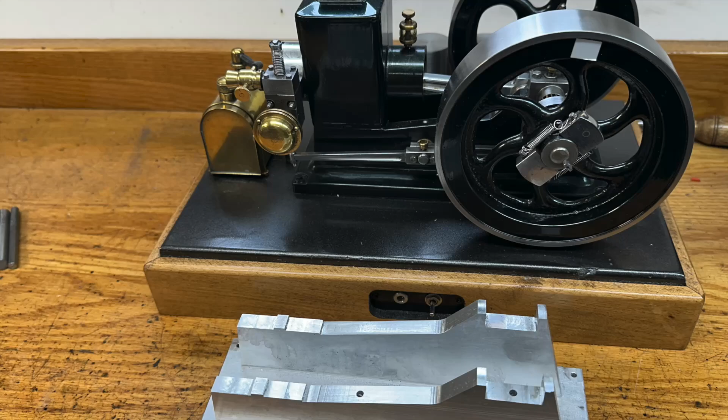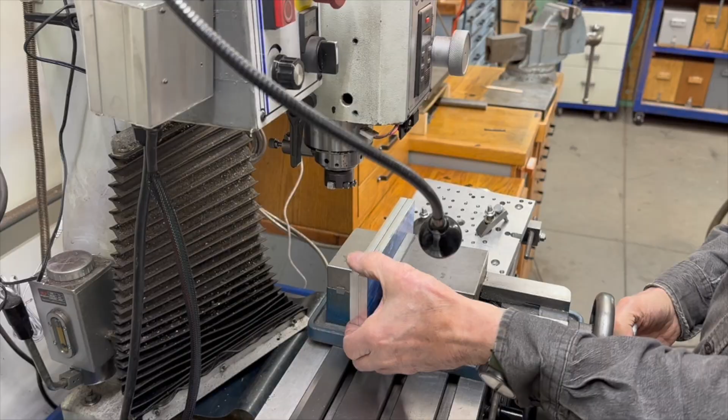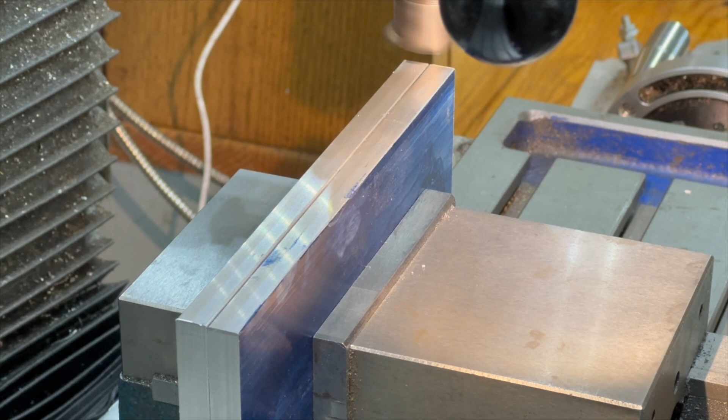So I've already put the bluing on it, and I've got them squared and finished on the edges and exactly the length. So I can go ahead and start laying it out. So this is extruded stock, and because of that it has a tiny rounded edge on it, and I want that absolutely flat and square, and it wouldn't necessarily be exactly square, so I'm going to take just a slight cut off the bottom of this. I'm going to take about 10 thousandths off of this for the first run here. That should be plenty.

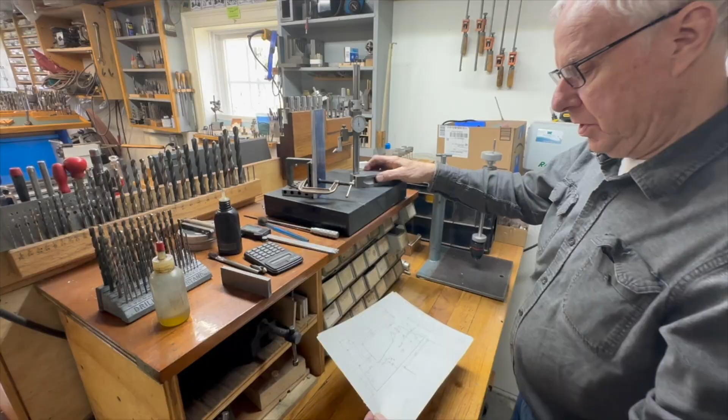So this is the bottom, and that's the back here. And so all my dimensions are from here. So I can just start drawing those lines. And the first one is at 7 1/4. And this not being a 7-inch height gauge, I have to put it on top of 2 blocks to get up to 7 1/4 inches. And that's going to be 5 1/4. That's just right. Okay. The next one down is the point, which is 7 1/8. So that's the angle there, an 1/8 inch.

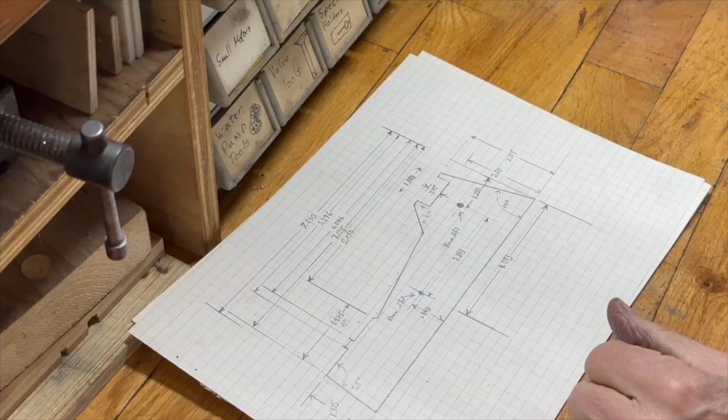And then we've got 5 296. We've got 5 296. Next one is down 1/4, so that's 1 250, right there. That's the notch. And then this is 5 1/4. Come down here to 2 150.

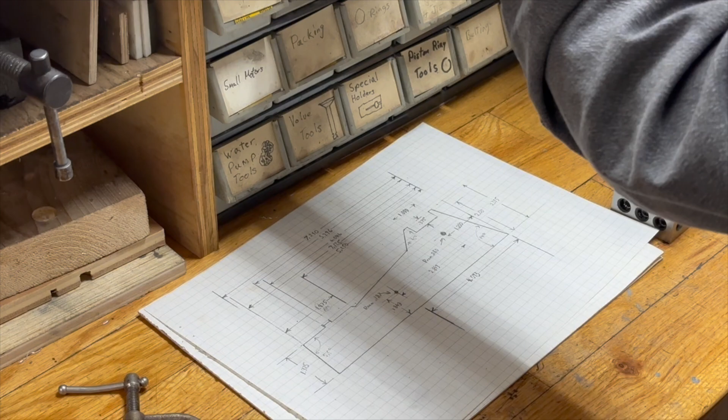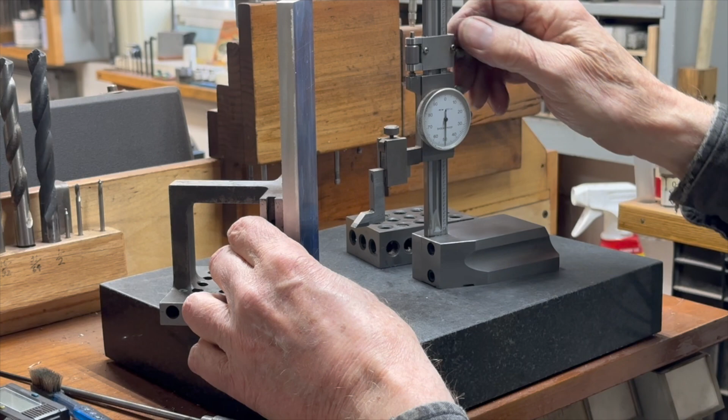The center of the bearing is at 1 inch and 1/4, 250. And then the bearing itself is an inch wide, so I just go 500 thousandths each side of that. So I'm going to go to 175, 1,750 I should say. That should be 1 inch right there. And that should do it.

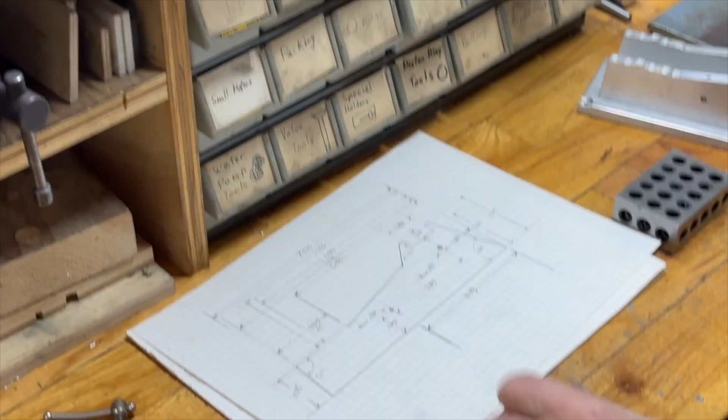No, we got one more dimension here. One that I didn't add up. Oh yes, I did. 493. Okay. 4093. Right there. So this is the hole. And the hole is 843 from the bottom. And then I'm not going to mark the hole for the gears yet. I'm going to wait till I get the gears in and then measure them.

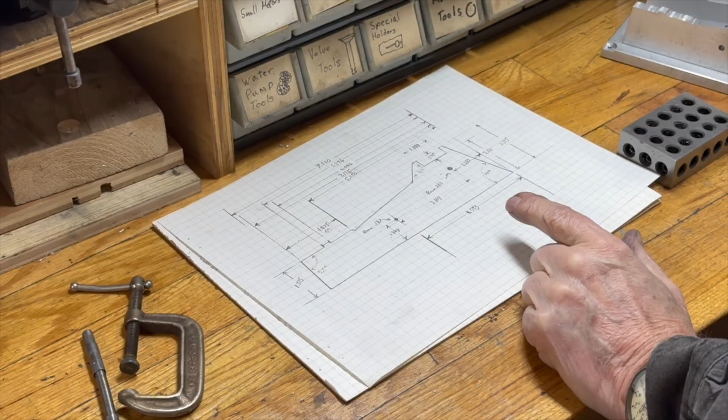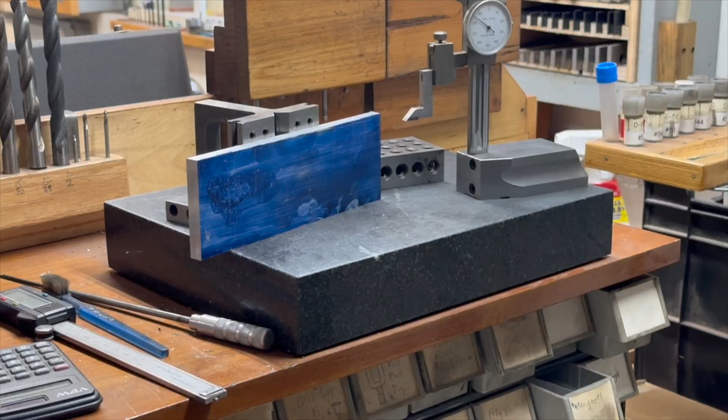Let's see, 2,375. Okay, that's it. The only thing I have to mark now is these two ones here for an 1/8 inch. Now this is the back angle here, comes off of this one. So I'm going to go 125, mark it. I'm going to come down here. This basically is eyeball stuff. Okay, so I'm going to go down 125. Put a mark there.

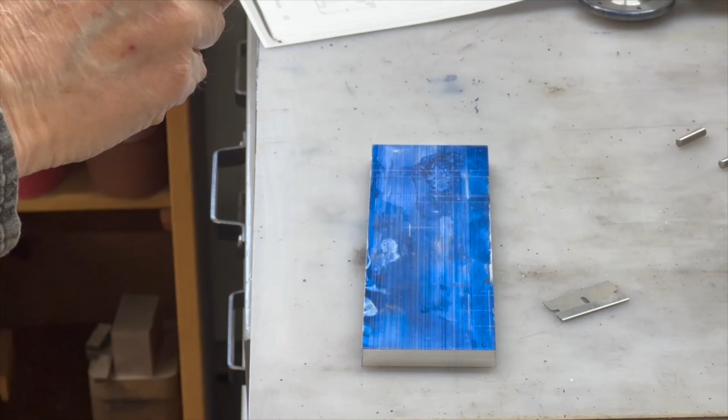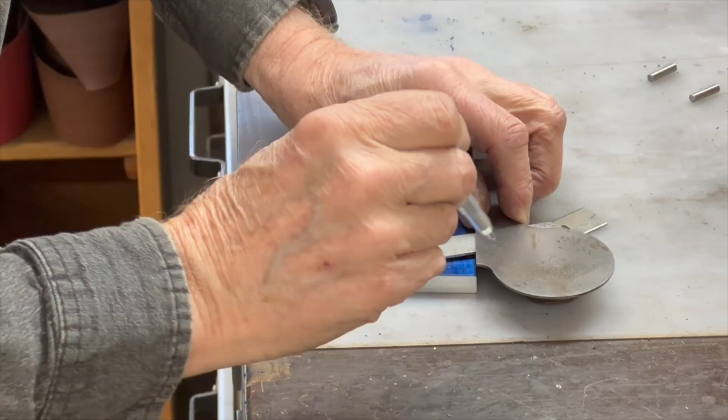Now I'm going to do some of the layout with a protractor. This back angle is going to be 14 degrees. So I'm going to just set this at 14 degrees and see how my marks came out. I have to use an eye loupe for this. Well, it's already on 14 degrees. So let's check that out. Put this right on. Put a mark on it. Pretty close, I would say. And the other one is a 45 degrees. It's off of here.

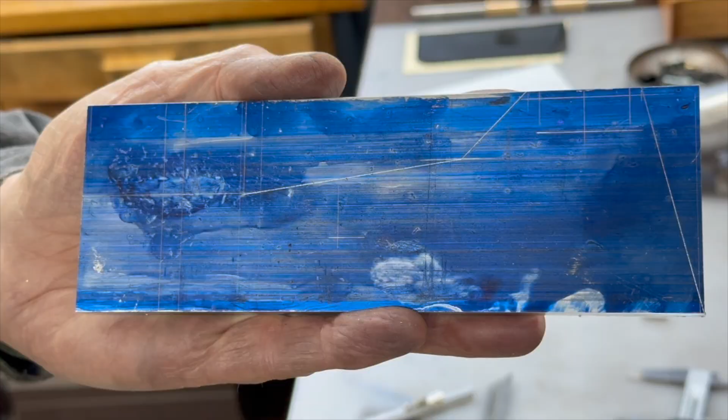And then we got to go down to here. So you're going to have to get a ruler and do that. 1 and 23/32. This one goes down to here. Okay, so there's the layout. I don't know if you can see it or not, but I'm going to go up and cut this out on the bandsaw. I forgot to mark the front here. It's 5.5 degrees. That done. Right there. I have to cut that off.

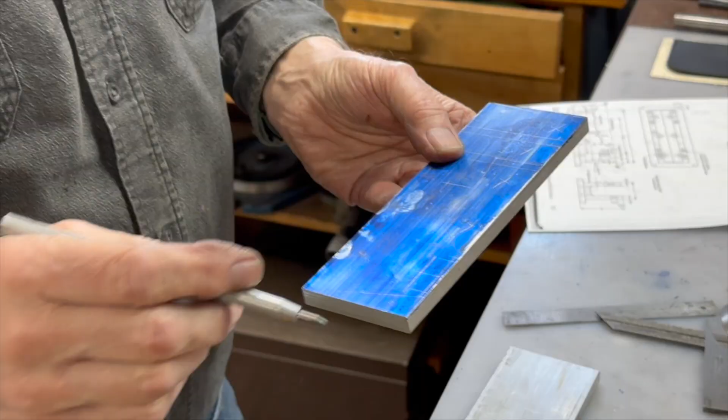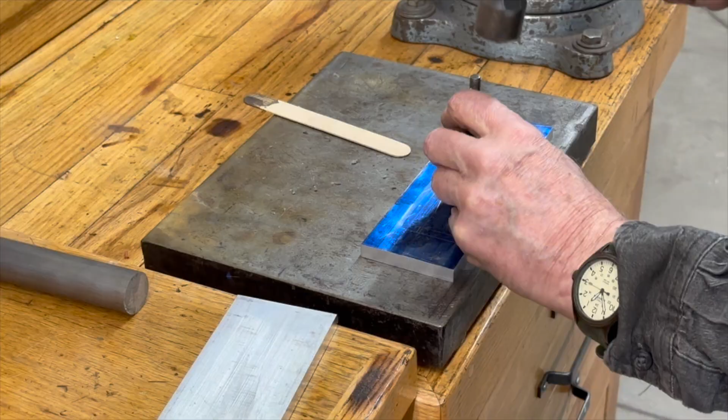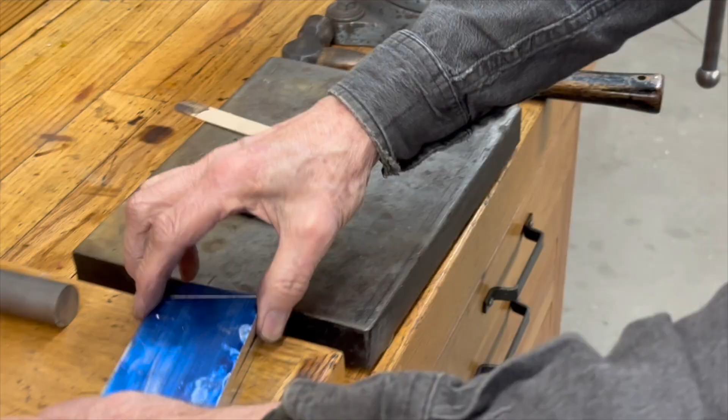And these degrees will be set better once I get in the mill, or I'll mill those edges. But I'm going to first saw it out on the bandsaw. So before I do these, I got to put them together and saw them out together. I'm going to put 2 prick punch marks here and drill 2 holes. This is for this hole we're going to use, but this one over here is just going to be waste after I cut it out, so that one won't matter. I'm going to put 2 3/16 holes right through the both of them when they're lined up perfect. So when I saw it out, I get both of them together.

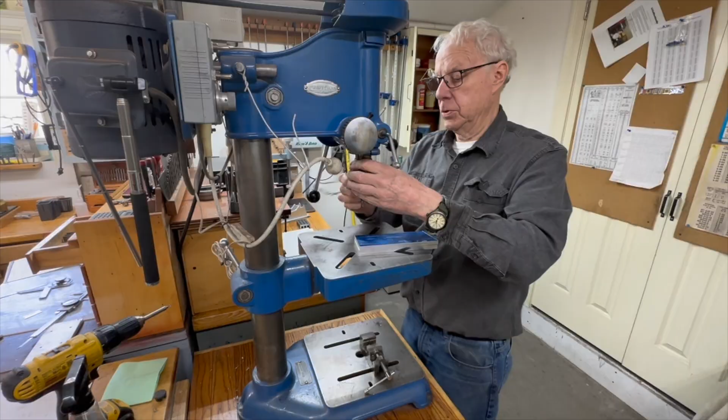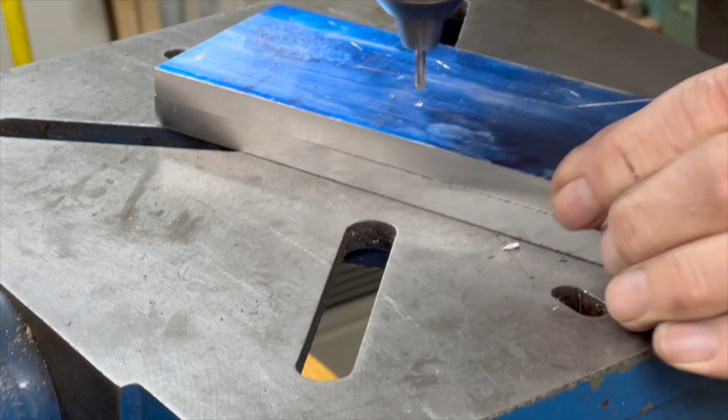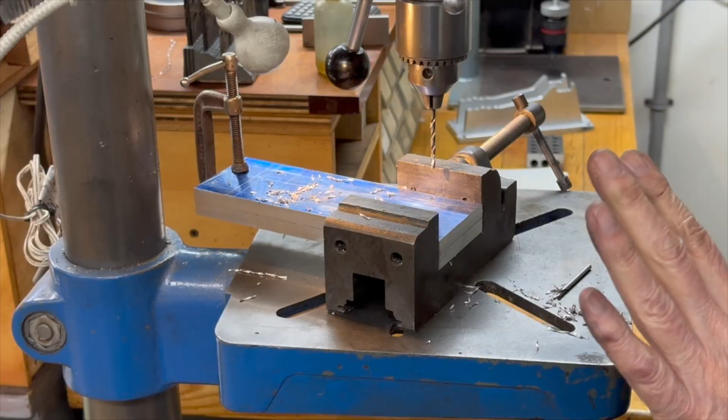Just going to spot drill those first, just in the top one. Get those even together. I'll put a clamp on them so that I can hold them in that place. Because I have to move this over. I think I ought to put it on this end, because I have to move it over to drill that one. Now I'm going to put a 3/16 inch pin in there, so I want a reamed hole. So I'm going to get a drill that's just under 3/16, 187. We go with 182, a number 14 drill.

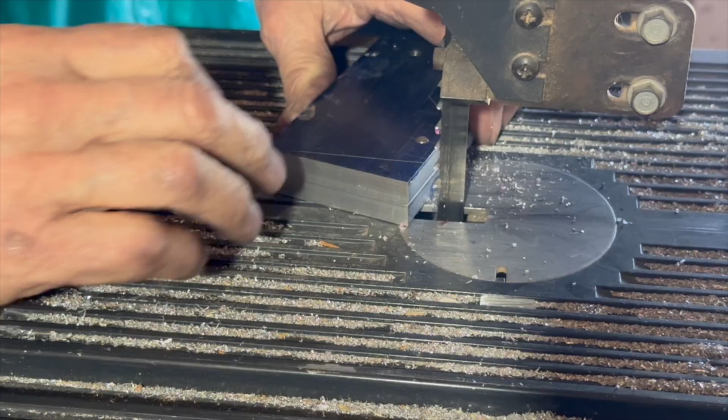Check that with the pin. Okay, this is an old bandsaw with a wood cutting blade in there, and that'll rip through aluminum pretty well, but you do have to put a little wax on it. It's pretty noisy.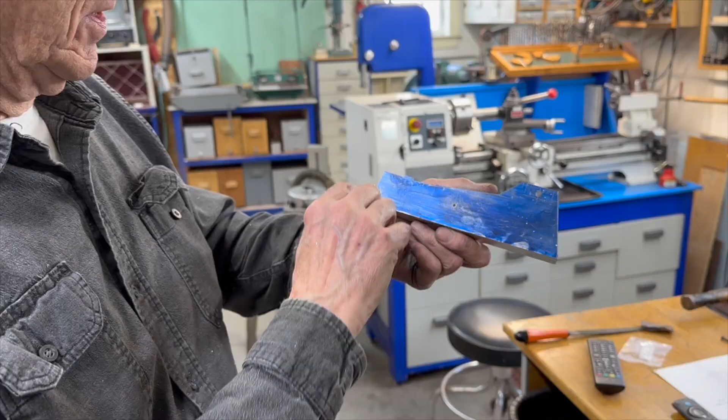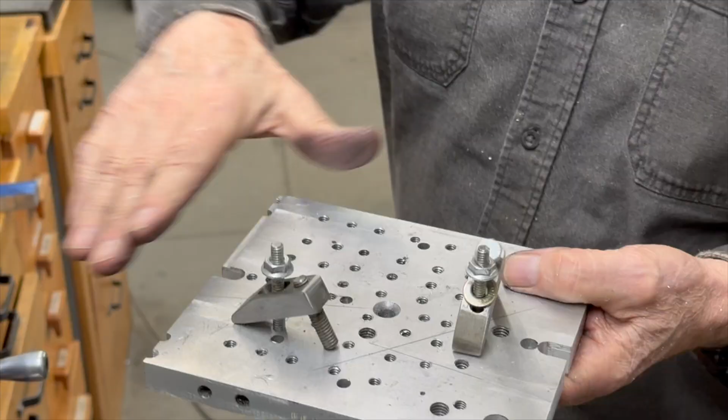Roughed out. So the next thing we're going to do is clean all this up with an end mill and get those angles perfect and get the ends right. And we're going to cut into this for the bearing block. So this is what I use on the milling machine when I have to do things on the flat and do things on the edge, and I can set this at an angle and do almost anything with it.

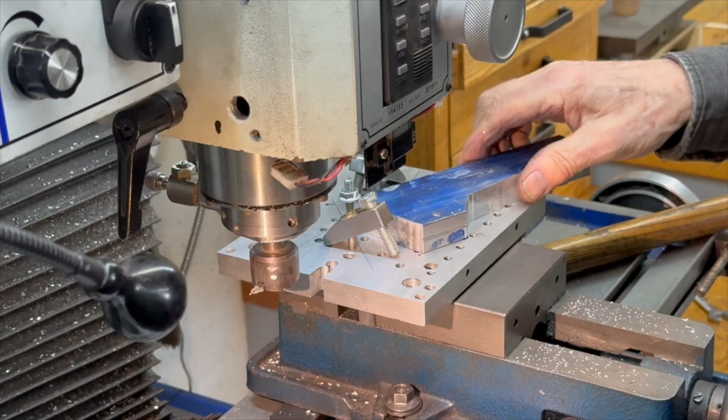I have to demonstrate it probably to show you, but I just put this up there like that, and I figure out what this angle is, and I go off of this angle and I can clamp it down and cut that back edge. So the first one I'm going to do is a 14-degree angle. I'm pretty sure that that is still a 14 here, so I'm going to try that.

So this block is squared all the way around here. I put it in, and it's marked front here. So if I put it in that way every time, the angle should come out just right. I'm going to move this up just a little bit, keep it near the front.

Somewhere near where it belongs, and put a couple of hold downs on it. So that being 14 degrees here, this should be exactly straight. I'm going to put one more clamp over here. I have to have this far enough out so that it doesn't hit the works in there when I make the cut.

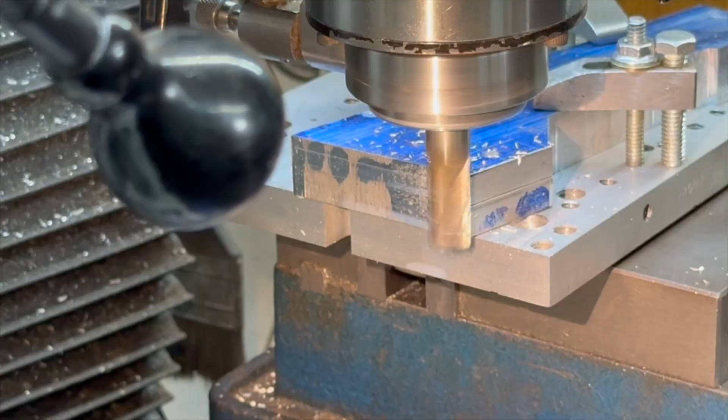Number one, gotta go in a little deeper. Everything's good.

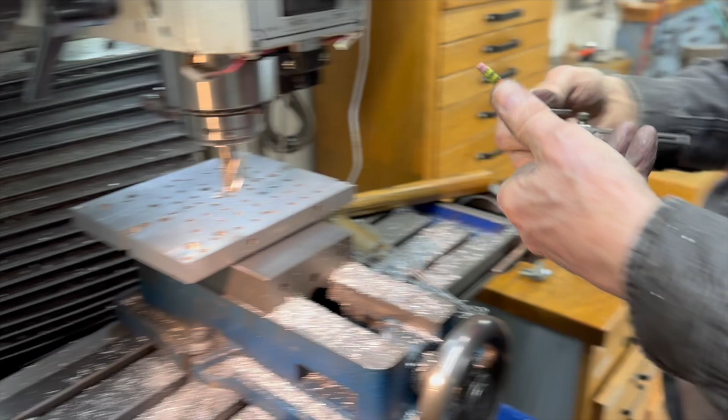You have to do it this way. So I'm just going to put a pencil mark on here, line it up with a pencil mark, and right there, like that. That should work.

A couple of hold downs on it, and we got it. Now, just for safety, I'm going to put this one down here because it's got a lot of leverage and they're both together, so it could twist it this way. So if I put one down here, it can't do that. It's got leverage way down there.

So now we can take the jig out, and I'm going to stand these up and finish them. There's a couple more cuts we got to do on it. It's in the vise. We don't need the jig.

Okay, so I've got to put this. Got to do this one first because I have to knock the pin out to do the other one.

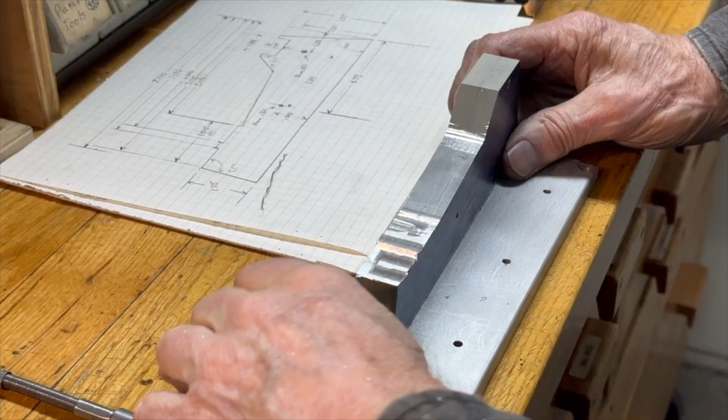Next is to put the tapped holes in the bottom here. For that we need the base, which we have here. And this is 7.5 long, and this base is 8.5 long, so that means you've got a half inch here. Right? So that means that the holes are in 1.5 inches, supposedly.

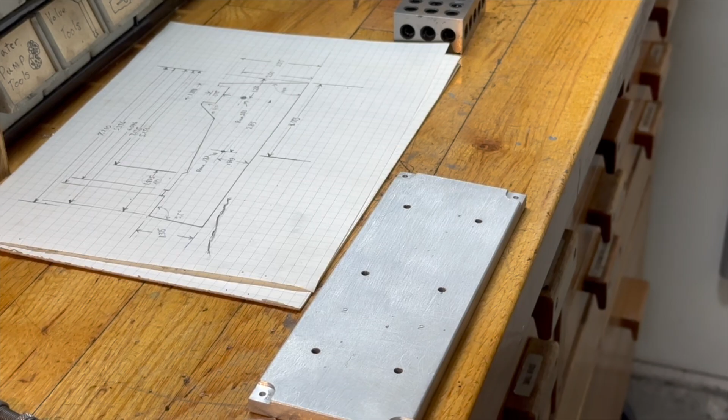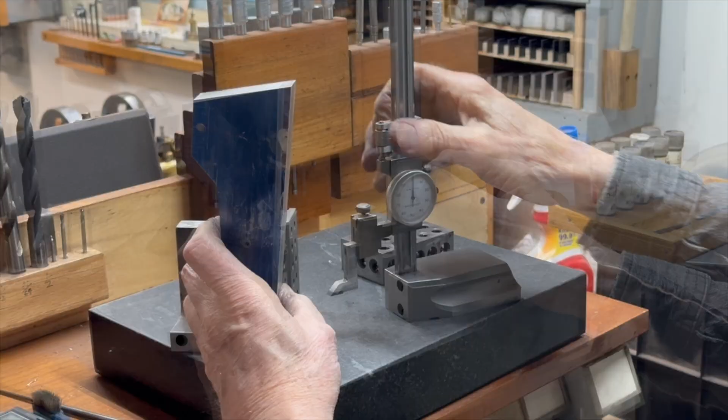Yep. So if I put this in 1 inch here and put the first hole in, I'll be in the right position. Set this for 1 inch. Okay, there's 1 inch. Okay.

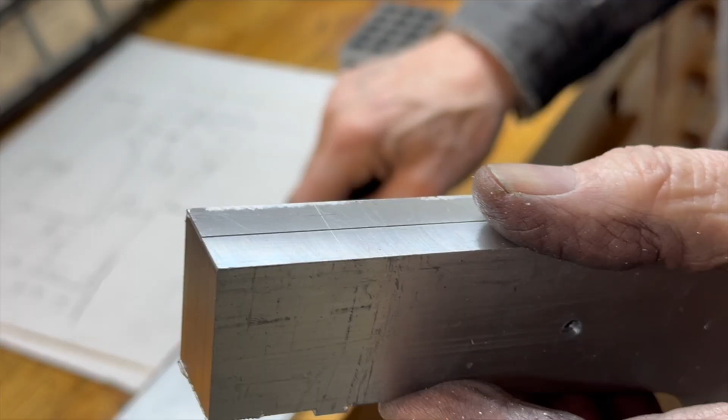3/8 of an inch thick, so I'm going to go up 3/16, which is .187. Right there, and I'm going to make a mark. So what I've got is the first hole here, and it's the right distance back, and it's in the center. So I'm going to drill and tap that, screw it on here, then line everything else up and mark the other holes.

So I'm going to go in here 5/16. It's .312.

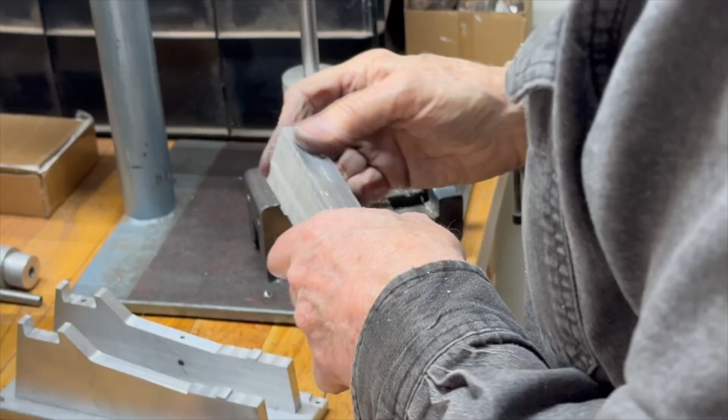Now I'm going to tap that one hole. So now I've got that one tapped. So now it's time, I'm going to separate these.

And you notice I haven't done this cutout yet. I'm going to wait till I get that clamped on to the base, and then those will be in perfect alignment. So if you make any mistake, it'll make up for it. So I'm going to tap that pin out of there.

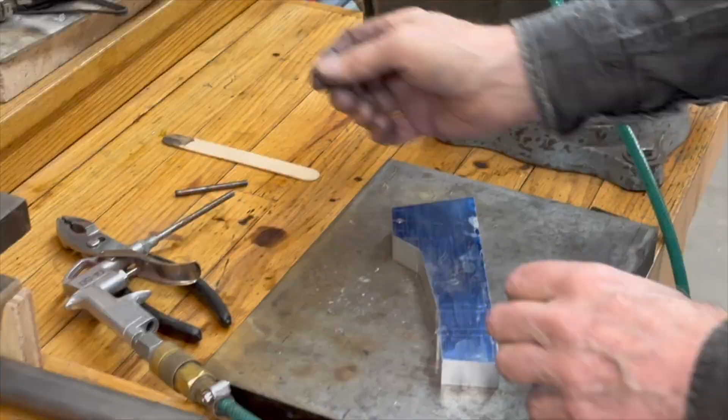Okay, and this one should push right out of there. And I got to remember this is the inside, so I'm going to put an X on them. This is the inside. Pin has to come out of here. Okay.

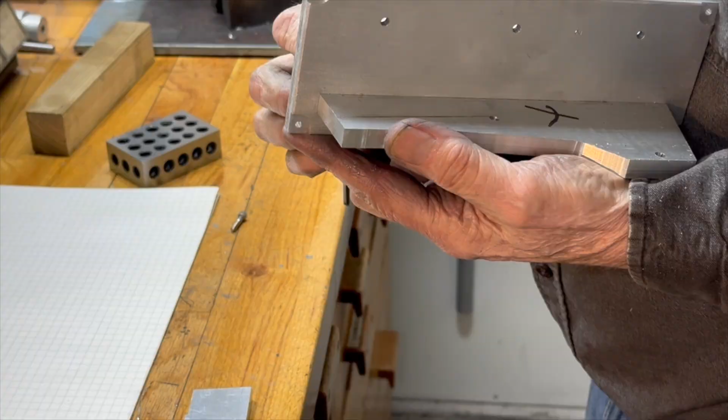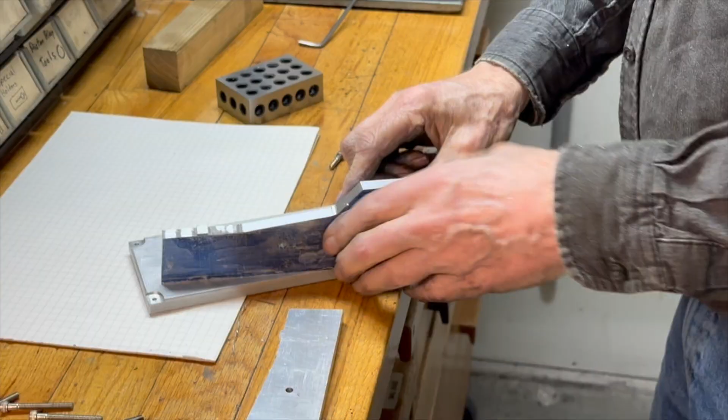Okay, there's that. Now I have this piece of wood that I cut exactly right. That's the bottom to fit in between, so they'll be exactly the right width apart. So I'm going to put that in there and put a clamp on it and line the front up with a square. Then I'm going to mark one hole on this side. So let's get that all squared away first.

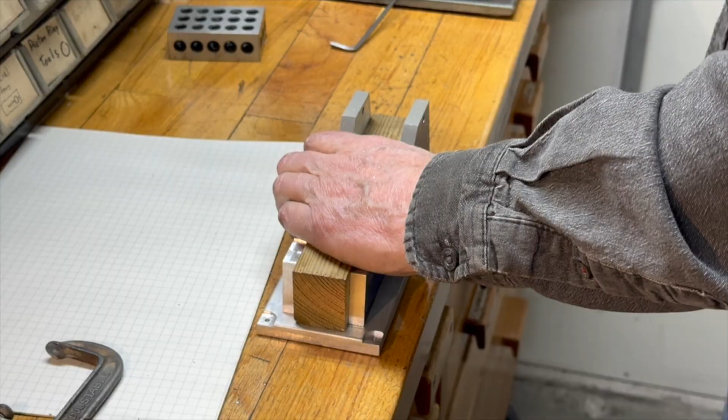Okay, for all the dimensions, we went from the back, so I'm squaring the back and getting it the same distance, so they're the same distance from the front and the back this way, and square. That's it right there. So now I'm going to put the clamps on it.

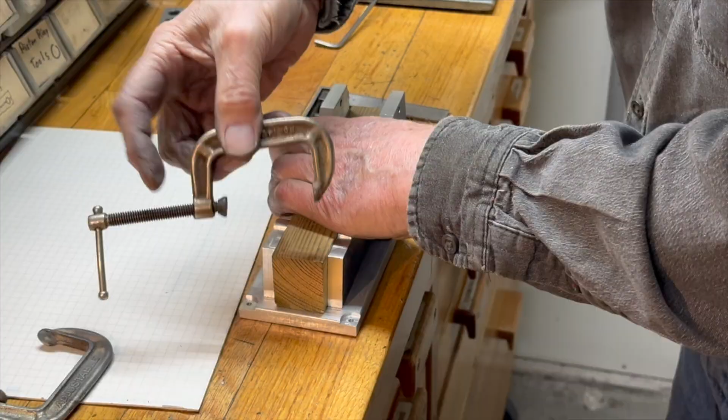And I'll have to recheck it and probably tap it into place. Just check that. So this has to be the same distance from there.

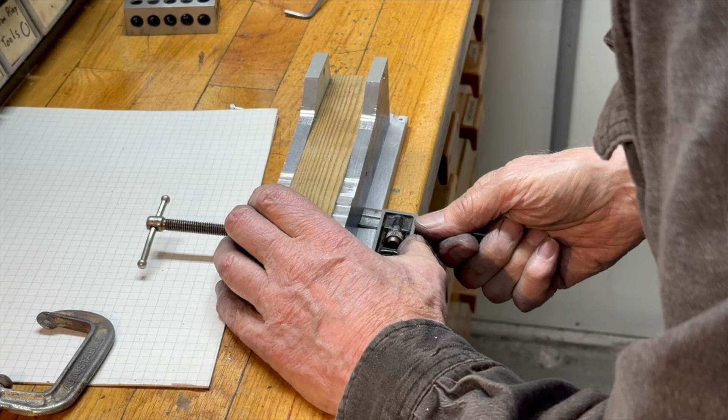I'm going to put a line on that. You need a scribe.

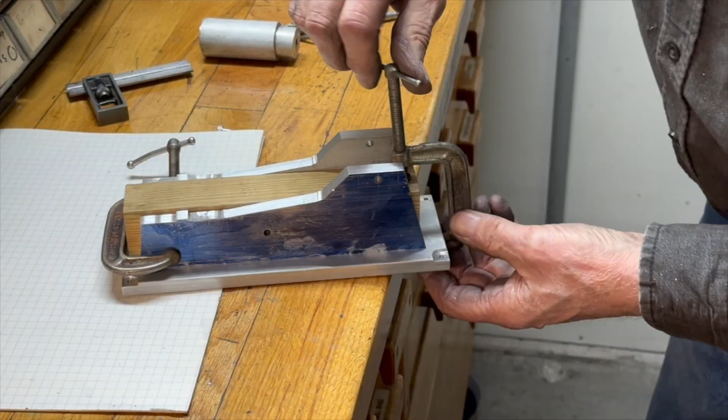It looks pretty good. Put the other clamp on it. Put it on the block. And then I got to get one more this way.

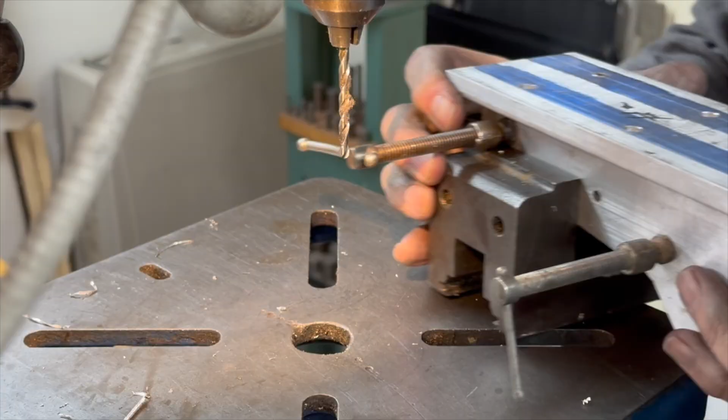Now I got to get this set up on something so I can drill it. I'm going to have to put this in the vise, I guess. So now what I'm going to do is I have this bolt here, so I'm going to drill and spot drill for this one. So all I have to do is mark that.

So this is the clearance drill, and I'm just going to run through there and touch that spot. And I'm going to remove the base.

Leave it right in the vise, because I got to drill that and tap it. And they have to be parallel and everything else. They have to be absolutely perfect. This is how you get them perfect.

Okay, so now, 832. So we're going to do an 832 this time, it's a 29 drill. I'm going to go the same depth, 5/16 of an inch.

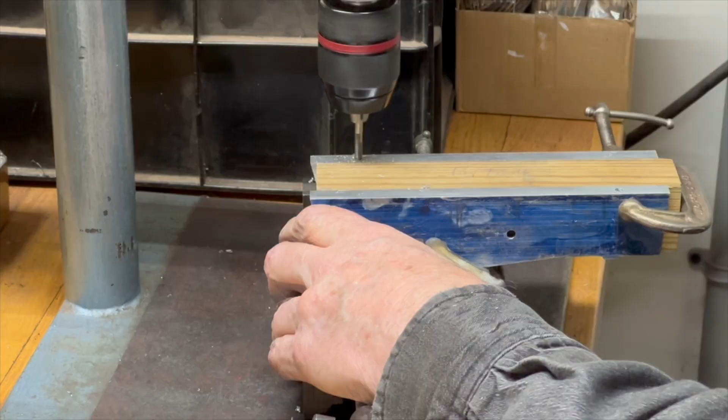Now that's on there square and straight, so I can go along and mark all the other holes, and then I can take this plate off and drill all the rest and tap them, and I'll be finished. We're not going to show all the drilling and tapping.

In order to finish, I have to support this other side, and usually I just use a parallel and a block, thusly, and then I can drill right across there.

As you can see, all those are in the right spot, right dead center. And now, one thing I'm going to do is match mark this so I know that's this side and this is this side.

Now I got a right and left here, so I got to mark those. If it's upside down, which is the right?

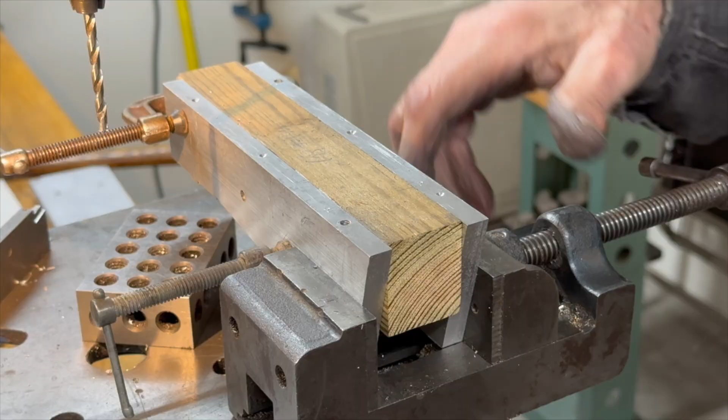That goes like this. And if it's this way, this would be the right. So I'm going to mark that R there, and I'm going to mark an R over here.

2R. And this one here goes on there. And this is R right here.

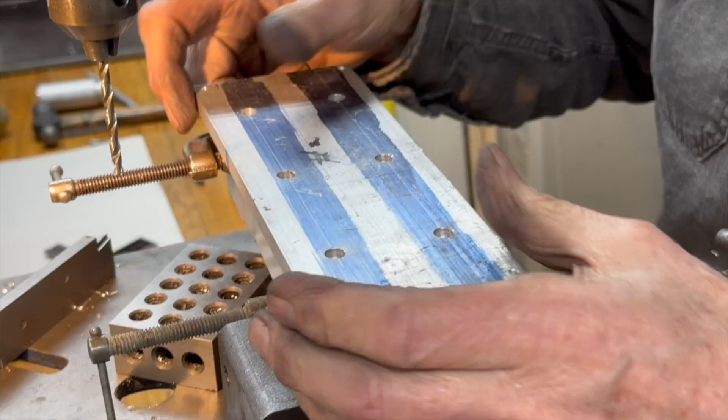That'll save me a lot of time later. When you're taking it apart and putting it together a few times, you'll find out that if you can put it together wrong, you will every time.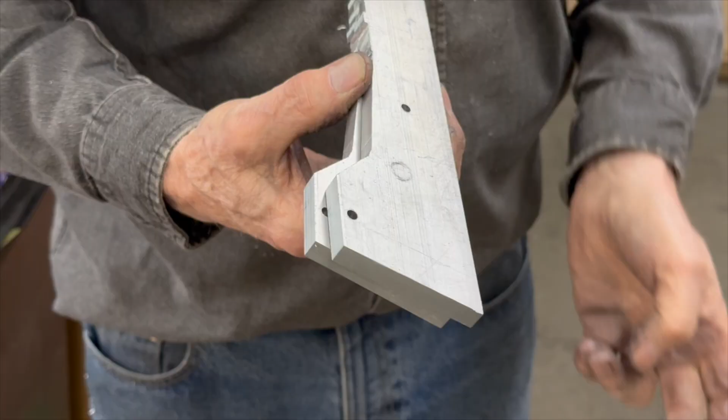Okay, now one other thing I want to show in this video before we stop is this can all come out of here. This hole is for the pivot, and the pivot goes on this side. The pivot goes here, but it doesn't go on this side. Well, I got a hole there, so we got to get rid of that hole, and I'll show you how to do that real easy.

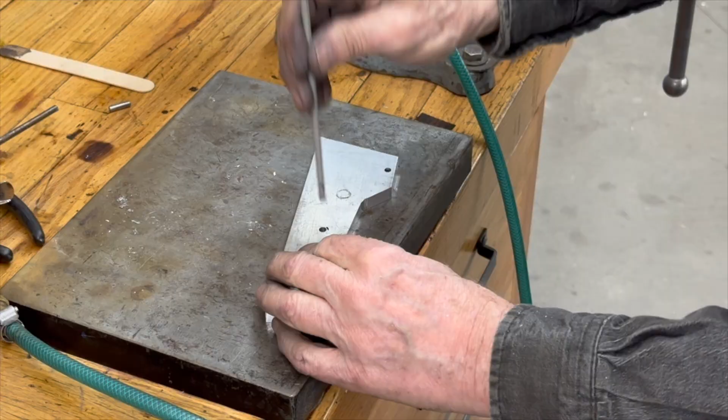This is a piece of 3/16 aluminum rod, so I'm going to cut a piece that's just a little too long and put it in there and hammer it, and it'll expand out. When I sand it out, you won't even be able to see it.

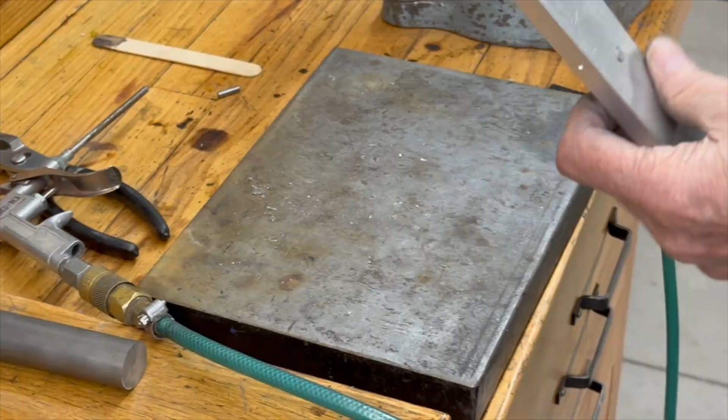So what that did is expanded in the hole. When I sand that off there, as you'll see, you won't even be able to find it. See where that hole is? You won't even find it.

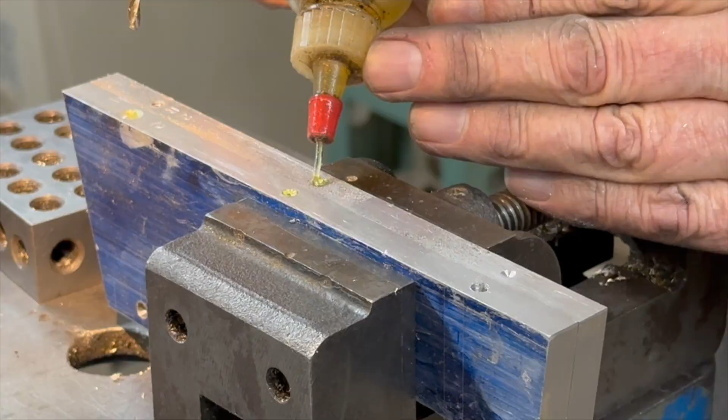This is going to be the tapping of the last holes there.

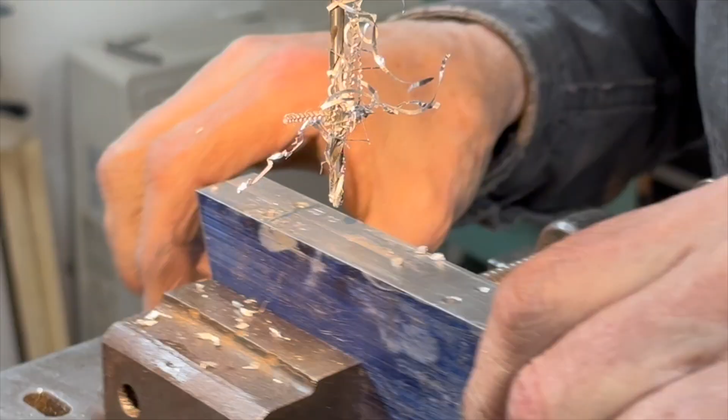Make sure this is flat. This is good, I already sanded this. Nice. Gets all the burrs off. And the blocks will go in right.

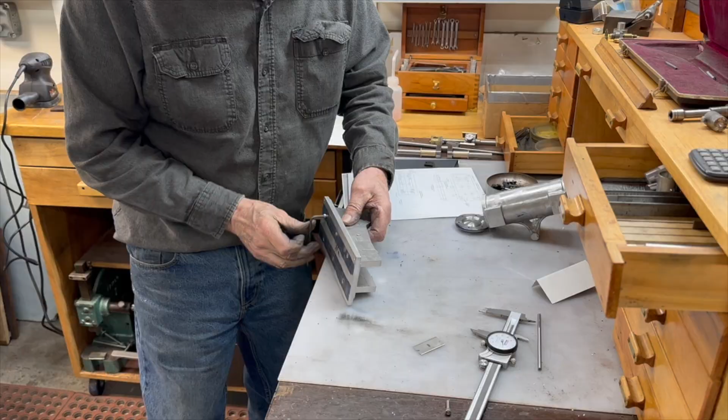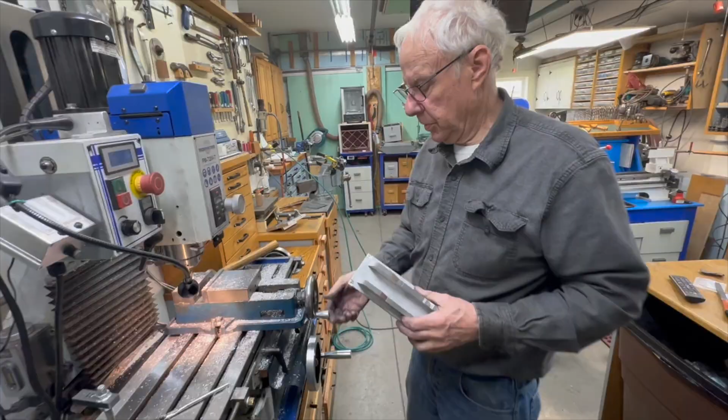Get them good and tight. That's the way they're going to be when it's done. Okay, there it is. Put this in here. I put the wooden block in between. That's just about right, I think.

Now, the reason I'm doing it this way is because if I had done it when I had those two pieces together, then separated them and bolted them on there, there's going to be a slight deviation. But when I do it in this device this way, there isn't any deviation. It makes up for any mistakes.

So I'm going to cut down in there, and we're going to make an inch wide, and I think it's 3/8 of an inch deep. I hope it's 3/8 of an inch deep.

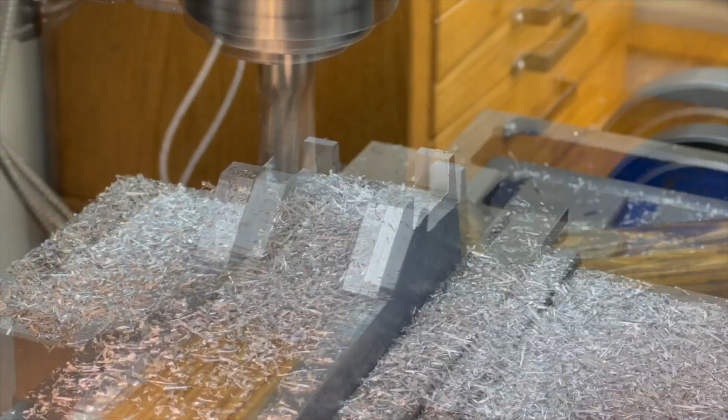Make sure those are square, and then I'm gonna go with the other side and take off 50. Okay, that should be my depth.

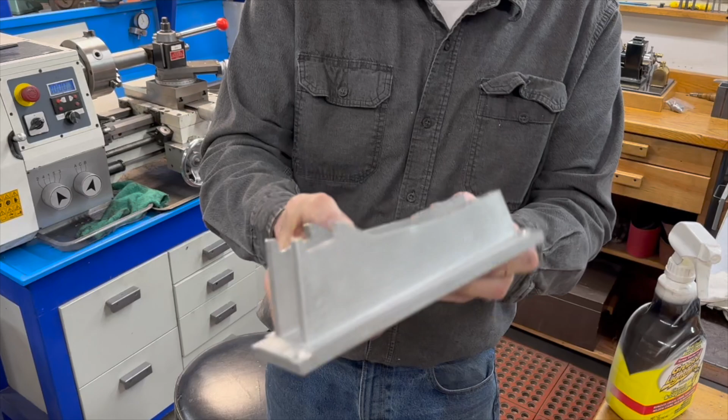Okay, so there it is with the sides mounted on it. I got to do a little more sanding on it to clean it up, but I haven't done this side yet. But most of the bluing is off of it, and you can see what it looks like.

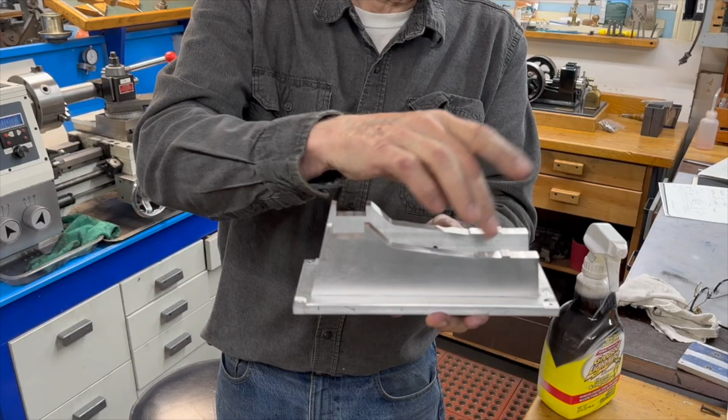And next week, we'll make the 2 bearing blocks for here, and the plate that goes on the bottom of the hopper right here. And that'll basically finish the base.